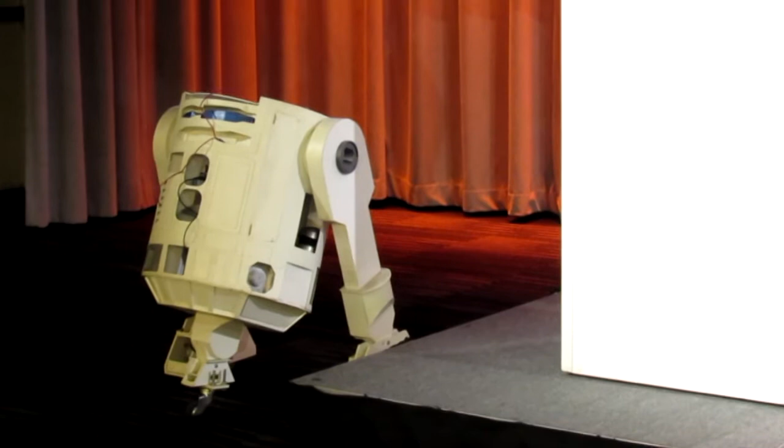They're both members, and my first question is, Dan, did these two both sign up for next year? No, they haven't, Chris. Whoever wins the coin toss to get the R2, you have to be a member next year too. That was the deal. I want to help support the club.

Do you guys want to toss a coin? Or do you want a Rochambeau? Basically, first come, first serve, and to the minute, they both responded almost immediately.

So, yeah, to know how much of a fan I am, all you have to do is look at my Star Wars purse.

It has working motors, it has a working battery, it has a motor controller, but it doesn't quite cut it. It does get hot really quickly. I did have it moving around, but I pulled the Arduino out. But basically, it's a Motbot on steroids, differential drive robot, ready to go.

Does anybody have a coin? Okay, official coin, I want you to toss it. 2019, ooh fancy, silver dollar. Wow, really sold it out. Okay, I'm gonna flip it, catch it, be prepared, put it over. Who wants to call it? We'll let the lady call it.

Heads. I don't know if this is heads or tails. That's heads. Heads. Heads? Okay.

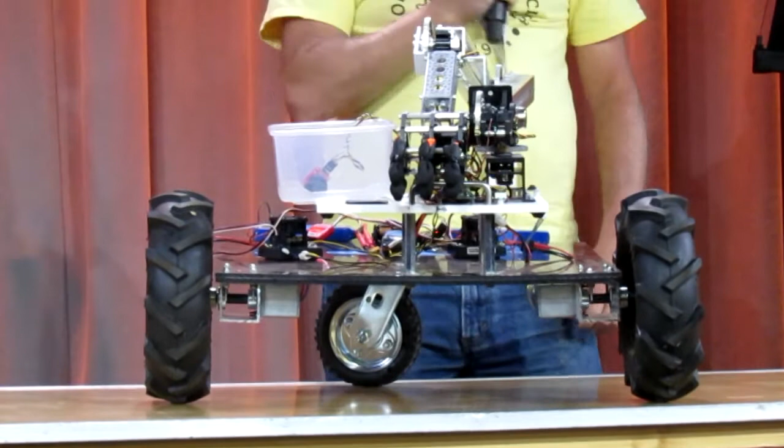He's heavy. So this is Marvin. It's all off-world, rovers are named, I think, or something probably.

You dropped your theme. What? I know, well, yeah, I picked this name a while back. So I've since gone on to the evil theme. Marvin was kind of evil, you know, he was like a bad guy. He was always trying to wipe out Bugs Bunny. So he's still evil, it just doesn't start with the letter B. Is that Biles' cousin? Yeah, right, yeah.

Well, so anyway, a little bit of history on this guy. Originally built this arm with Mike. We were doing the NASA retrieval challenge thing. I've just kind of kept this arm ever since, and it just keeps moving along.

So I wanted to do something along this line for a while, and I had a powered wheelchair base for a little while. I got these off-road tires for it, and then I think Alex ended up with that wheelchair. I sold it back to him, and then I just kept these tires. And I love these gnarly tractor tires.

They're so cool, I have to build some kind of robot around them, so I have something to do with these tires. Anyway, so I wanted to build something kind of low to the ground, where the arm could reach down easily and pick stuff up, that kind of thing.

But I wanted good ground clearance, so I found these motors from Superdroid Robots. These tires and the motors are all Superdroid Robots, and they make some good stuff. If you want something a little bigger, more robust, Superdroid Robots is pretty good.

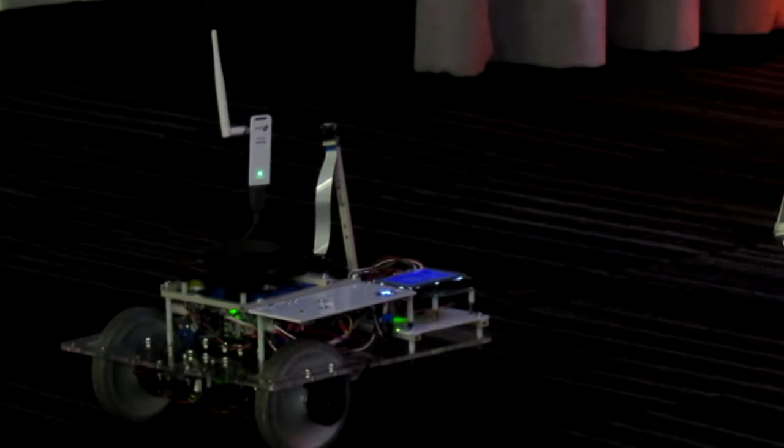So if we're lucky, as you can see on the screen, if it didn't disappear on us for some reason - yep. When I got here, I was able to map the room somewhat when I got in. If I can find the robot, which is right there, he's probably more over there hopefully. Set him up here.

Just doing this live, so we'll attempt a vague tabletop or floor bot challenge.

Except he's planning a way through - the robot's going to present a mobile obstacle over there. Yeah, the map's not very clear, it's not going to get through there because the map's not good enough at that point. Same thing, go back behind.

But anyway, that's the progress so far. You can see it's got a camera there, and you can see the camera view on the side there.

I do have voice command. When I have it fully mapped, I can mark waypoints on the map, and then using a phone app I can say 'robot go to' and name the waypoint, and it'll actually drive across back and forth to the waypoints.

What's he trying to do now? It's got completely confused because I picked it up, and now it's kidnapped robot, and it's just confused trying to get to its target that it doesn't know where it is anymore.

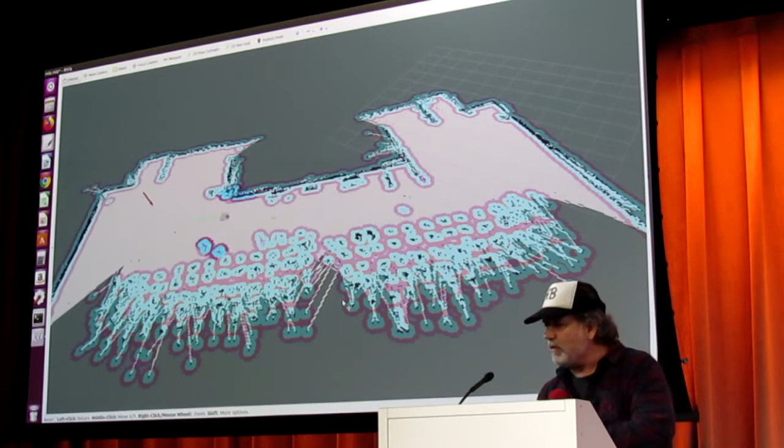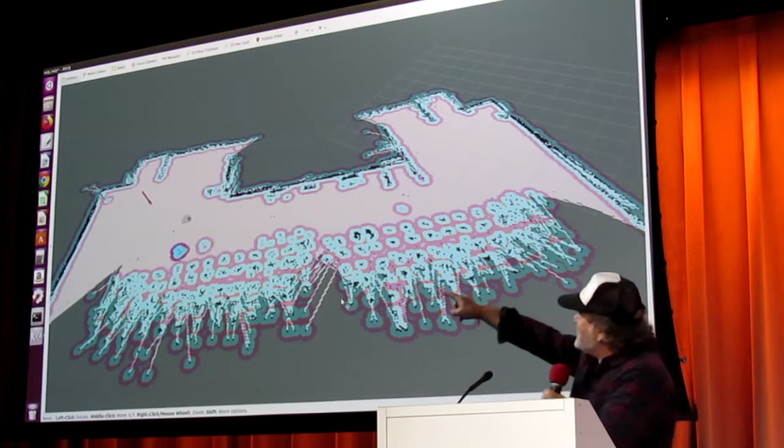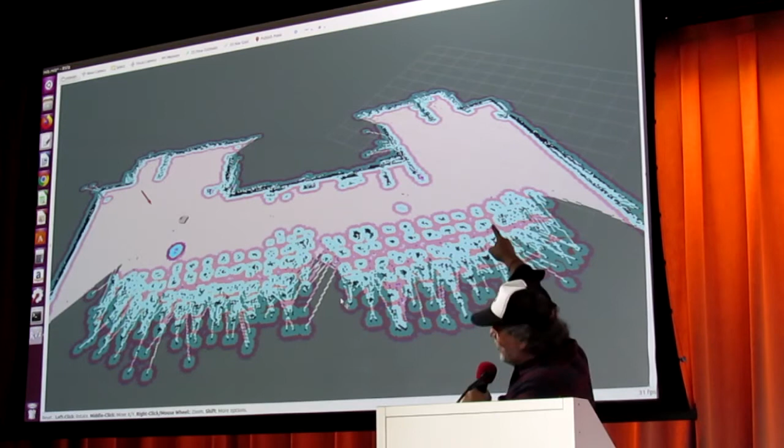More or less. Anyway, what I've done is drive around and create the map, and then I've got a little package I call floorbot.cpp, where you put waypoints in, so he's doing waypoints now. But like Ralph, when I get over in this corner, you need to place them back and forth to keep him in a particular zone, because if I leave one long shot to the other end, he tries to go backstage, so you may have seen me try to herd him forward.

Is that a new model of the Neato? No, that's an old model. On the screen, on yours? Oh no, that's the same URDF, Unified Robot Description Format.

Bear with me, I'm trying to find something here. I've got the Raspberry Pi audio in there also. Yeah, hang on a second. Let's just use this one.

Hey, the robot's not allowed to wander the facility without a pass. Unless it's badged. Yeah, badge.

Hang on one second. Don't block the lidar. Oh cool. Okay, hey now. Is he gonna... he's probably going to try to go behind here. Let me... shy.

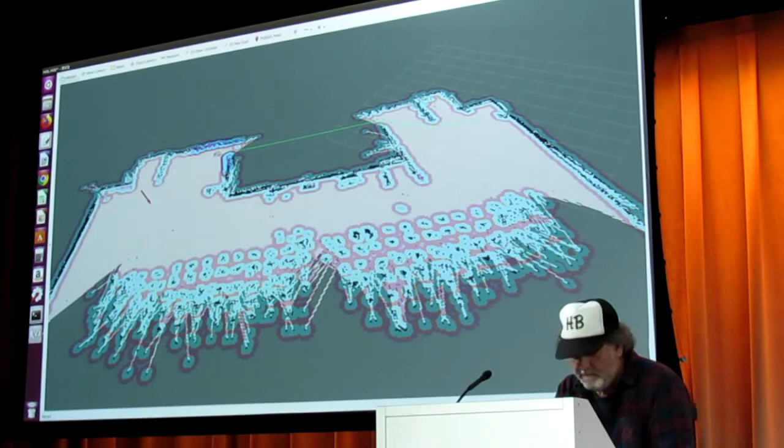This one's here, so if I get down here, I can try and herd him in the other direction. But oh, I know what I'll do. Hang on a second. Bear with me, oh it's up here. Let's do this before I get caught up in the cords also.

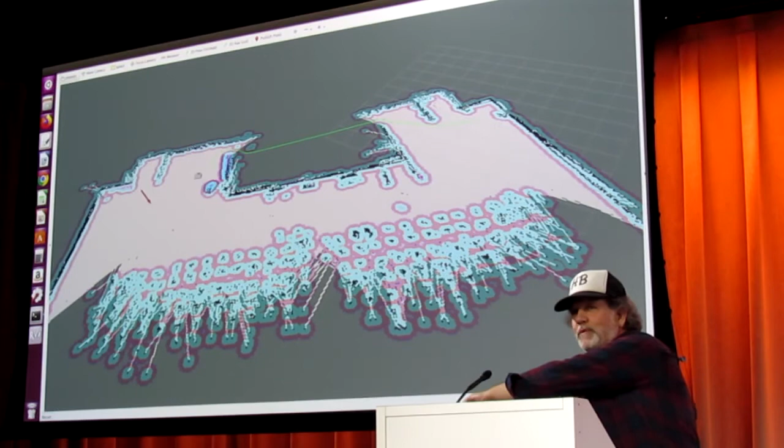Does Turtle like the lighting back there? No, what it is, is it sees that as the shortest path to the other goal. With my waypoints, I placed one nicely over here, but left him with like a Hail Mary to the other side, and he thinks he's going there. So here I'm teleop controlling the robot with the keyboard to move him up until the path planning takes hold, and now he'll go all the way to the other side.

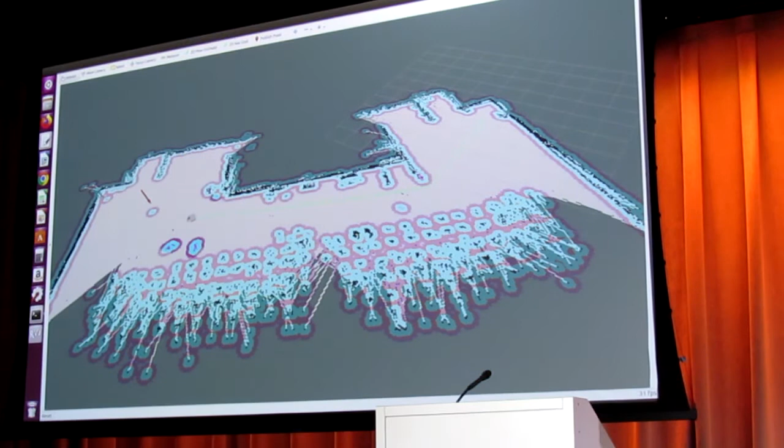So I guess that's Floorbot Challenge 0.5. Anyway, that's all I got.

Questions? Can you put a no-go zone on these kinds of maps? Yeah, exactly, you tried it.

Thank you very much. The no-go zone is something that's in the consumer product, the Neato robot vacuum cleaner, which uses its own proprietary code. But the deal is the Neato robot vacuum has a micro USB port where you can drive the wheels, read the encoders, and read the LiDAR scans. We've got the botvac package, thanks to Ralph Ganock, and Mike Ferguson wrote the original Neato package, so there's a ROS package for this. It also reads the sensors, the bump switches, and I think it reads the magnetic switches in the...

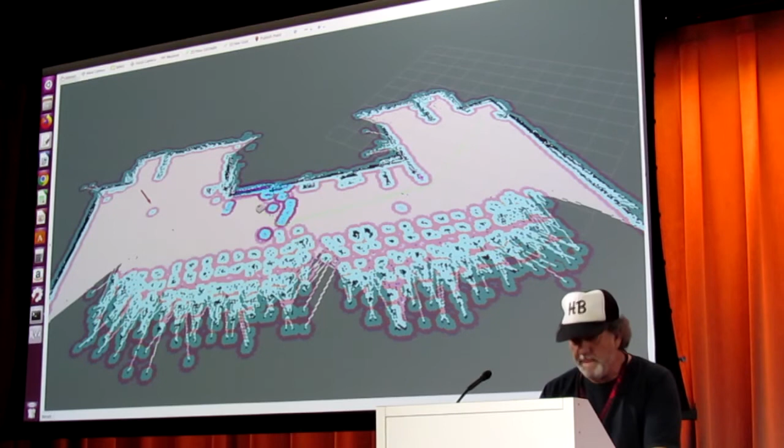Dr. Alan Fetterman, ladies and gentlemen, yes. I just did a clear local cost map there. It helps navigation.

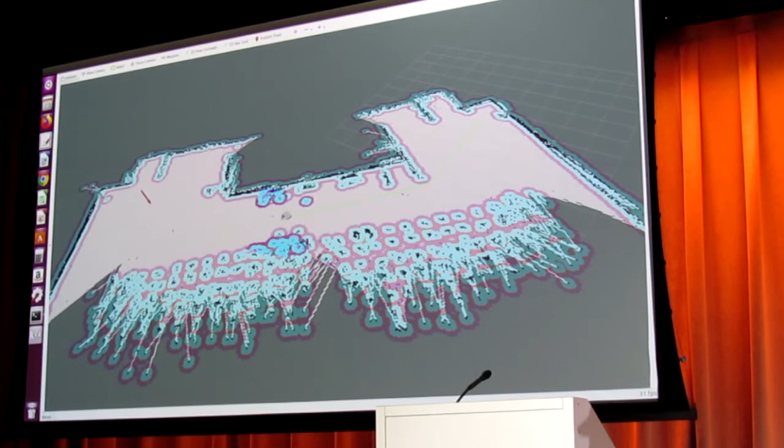But this is a good project because right now, I swear, it's 12 pages: 8 pages of driver that takes the Neato commands and data and turns it into variables, and then a 4-page ROS wrapper that puts it into all the things that are ROS, including G-mapping, the RViz visualizer, the path planning, the localization, and all that good stuff.

But as Alan's pointing out, the hooks are there for the drop sensors and bump sensors. Actually, Michael Wemble here has written a package for the bump sensor. Of course, the more you know, the less you know. Now you can launch that package, and when it's navigating and hits something, the terminal says, I heard a bump. Now you need to tell MoveBase what to do when it hears a bump.

More of a general ROS question: has anybody else used one of the other SLAM packages in particular? Has anyone used Cartographer yet? We're dabbling with it right now. Who, what, where? One of the projects I'm working on.